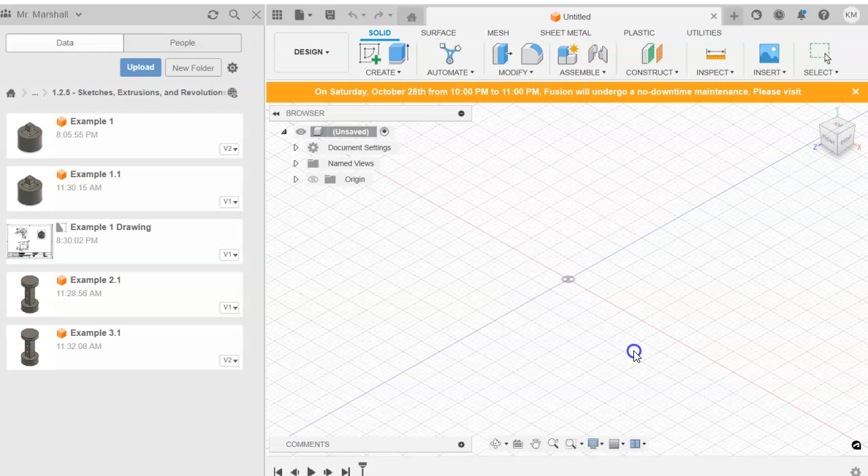I've got Fusion up here with the data panel open. Let's go ahead and start a new file. I'm going to hit save since this is untitled right now, and we're going to call this example 2. Once it's saved, you'll see it pop up in our data panel. I'll minimize that with this waffle button, and let's get to dimensioning.

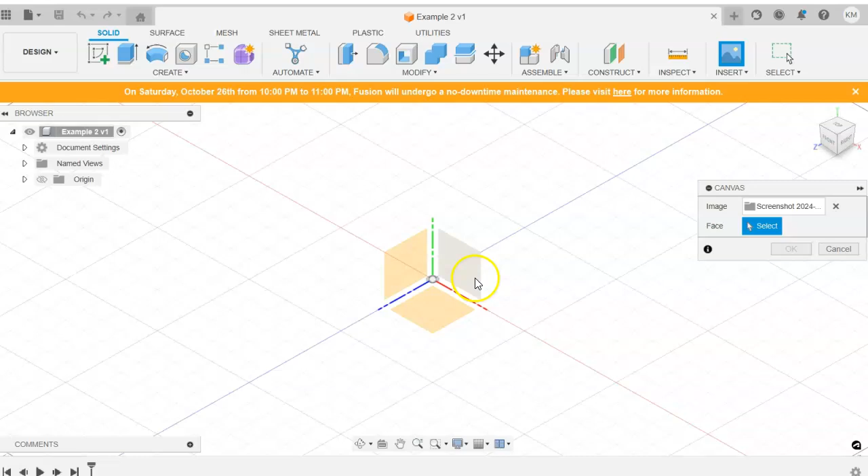As you saw in object number 1, I placed a canvas which we can use to reference, and we're going to do that as well for object number 2. Before we get started, I'm going to hit Insert and move down to Canvas, and find a picture from my computer saved on my desktop. I'm going to place that on the plane we're going to be sketching from. The first sketch is going to be on an XY plane, so let's choose that to place our canvas. I'll pull it out slightly to the side so it's out of our way, and hit OK. If I go to our front view now and zoom in, we can see that reference drawing there to pull some dimensions as we model this object.

Another important thing to note is in the last model we changed our document settings to millimeters. This one is in inches, so I just want to double check. We did not change any settings, so we should be good to go there. But if I hit this flyout, I can double check to make sure our units are in fact in inches.

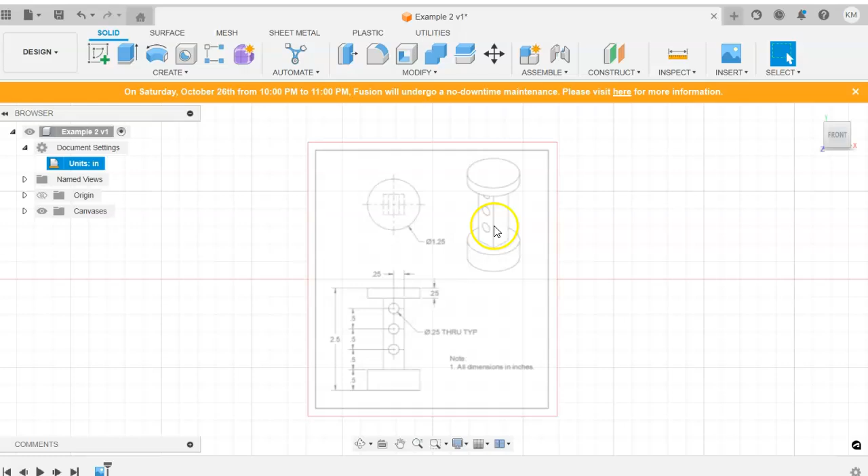So as we look at this object, let me go back to my front view again. It's like a bit of a dumbbell shape, and I see quite a few features here. Let's break this down and think about how we're going to approach this modeling sequence. I see this base, this diameter or rounded base. Then we have a rectangular column running up through the middle, as well as a round top. And within that column, it looks like we've got 3 holes running through it, so 1, 2, 3, 4, 5, 6. I see 6 different features in total making up this object. We're going to work from the ground up: this base, then the rectangular column, then the top, and then we'll work on these holes.

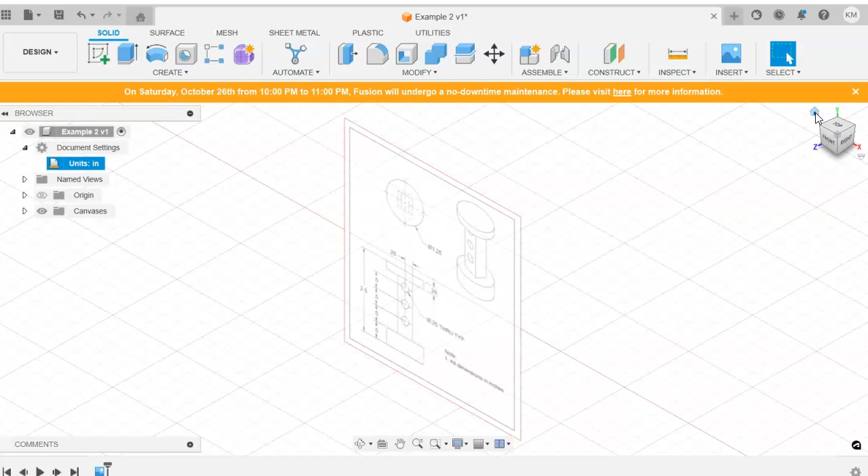Let's go ahead and get started. I'm going to move back to my isometric view using my view cube, and we're going to create our first sketch. Zoom out to where I can find our origin, and yes, we're going to sketch on the XY plane. Now for this first rounded base, let's go ahead and use our revolution command again. It's a command we just learned.

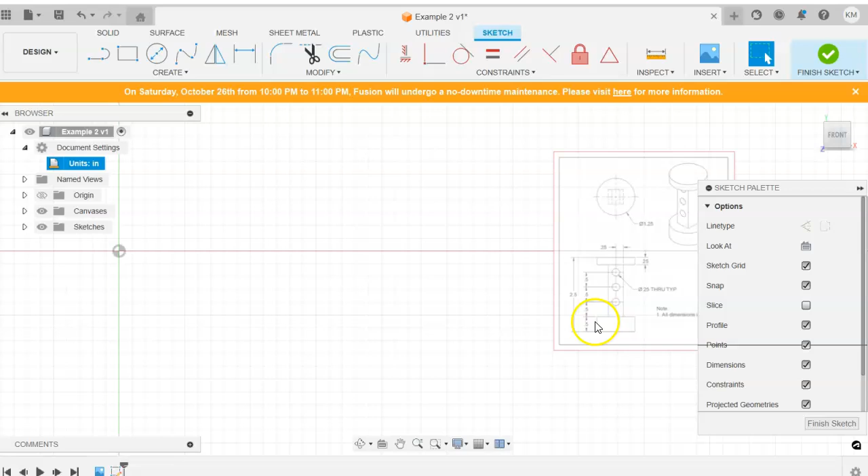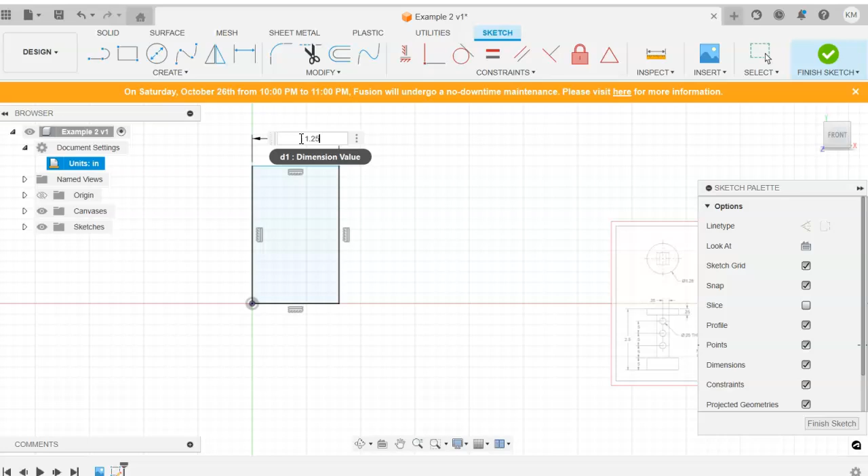It's got a diameter of 1.25, that's the total diameter. So I'm going to use a radius of half of that, doing half of 1.25, and I need to pay attention to my extrusion height here of 0.5, it looks like on our reference drawing. So I'm going to draw a 2-point rectangle starting on our origin. I'm going to use our dimensional constraint here, and I'm going to use a formula. So rather than typing in and doing the math on my phone or something, I'm going to place that constraint and say this is 1.25 divided by 2, and hit enter. It goes ahead and does that math for me, which is nice. I'm also going to put a vertical constraint here, which again was that 0.5 inches. I've got that rectangle now.

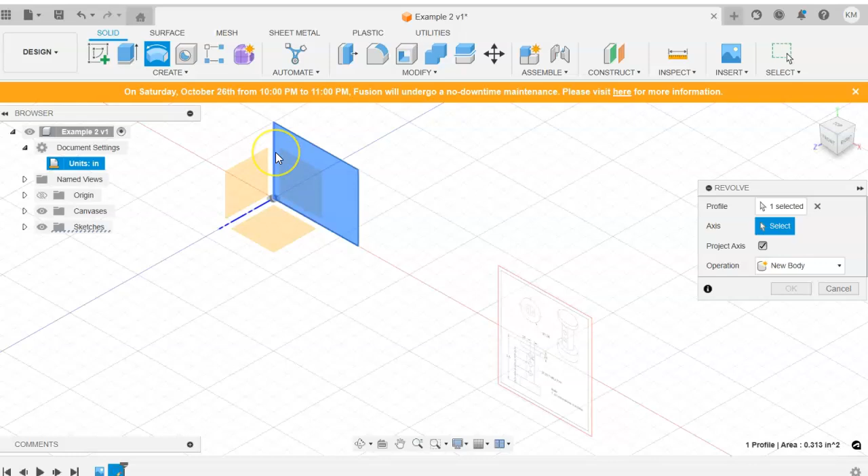We can go ahead and hit Finish Sketch, return to isometric using our view cube, and let's use that revolve command. It's automatically selected my profile. I need to select an axis, however, so I'm going to select the axis that is actually my Y axis off of my origin. It's also the left edge of the rectangle we drew, and you will see now that we've got this rounded base that we're going for. Go ahead and click OK, and our revolve has served us well.

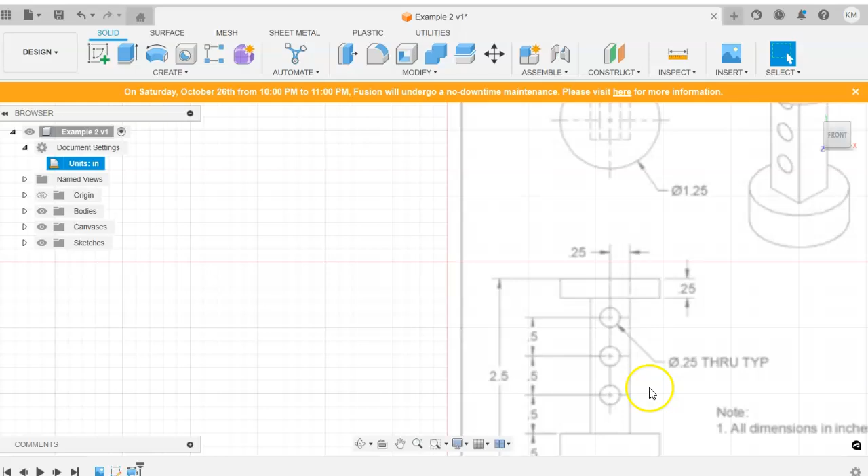Now let's go ahead and create this rectangular column coming off of the top. I'm going to glance at our reference drawing again to get some dimensions. And as I look at this, frankly, I think we're missing a dimension.

I would like to see this total distance here, but assuming these holes are centered within the column, I can see a 0.25 dimension going halfway. So I'll make the assumption that the entire column is 0.5. Looking up here, it also looks like a square, so I'm going to make this a 0.5 by 0.5 square.

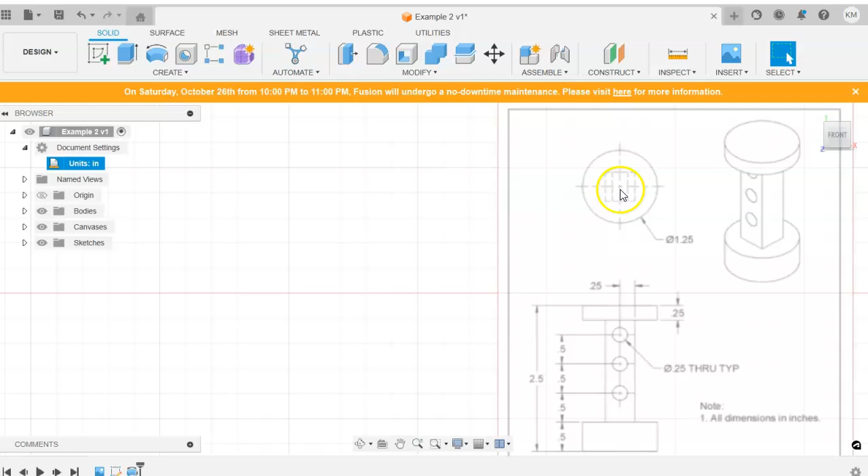Now I do think we need dimensions for that when we actually draw this. I think our reference here is incomplete and we should have those dimensions specified.

So let's start a sketch. We're going to work on the top of our base. Select that as our surface. We're going to draw a 2-point rectangle, kind of covering over that origin. We're going to use a dimensional constraint here and make this 0.5 by 0.5.

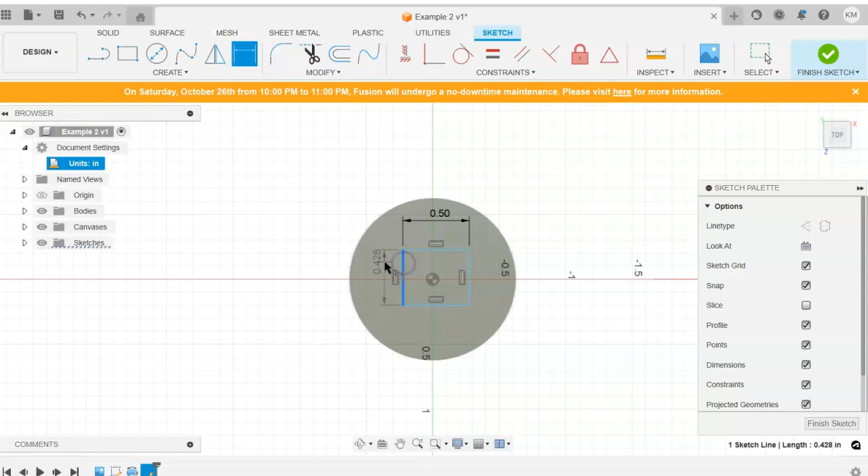Now that covers the size of our feature, but we need to include some extra location constraints. So I'm going to make this 0.25. And that was horizontal, so we'll also do a vertical here of 0.25. All of our lines are now black in color, which means they are fully constrained.

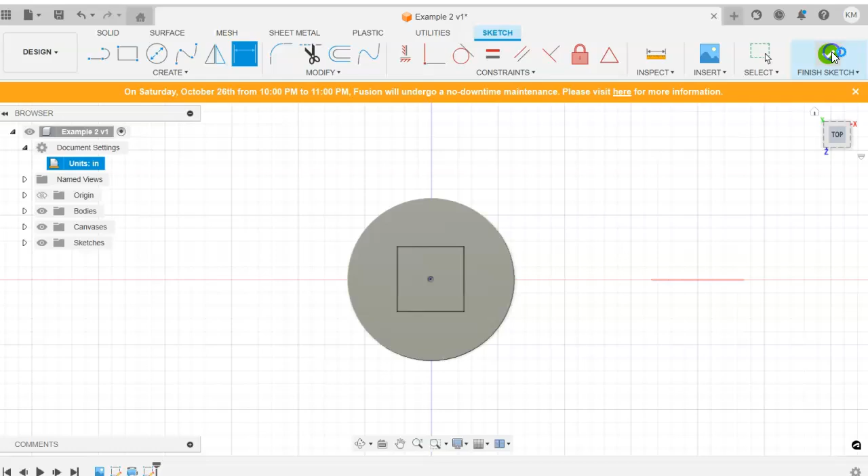So we can go ahead and hit finish sketch, and we're going to extrude this up. I'm zooming in here on my reference again to see this extrusion height. We're going to have to do some math again.

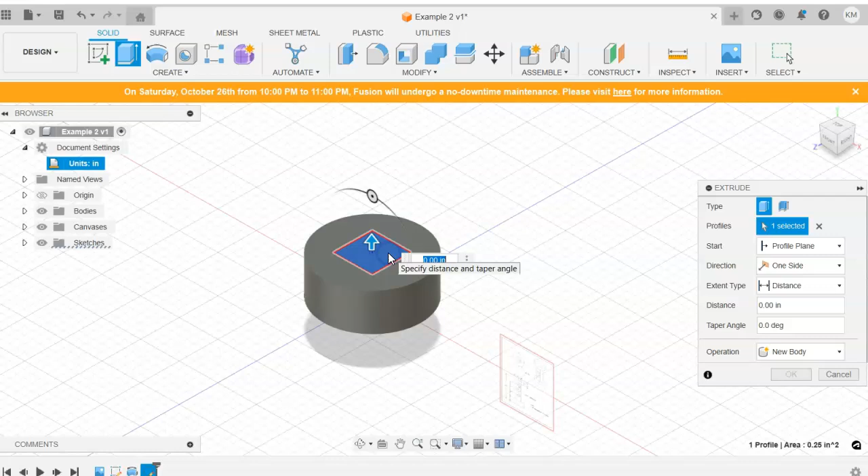So I'm going to use a formula here. 2.5 is the total height. I've got my base of 0.5 and my top of 0.25, so I'm going to take those two things out. When I make this extrusion, I'll go to extrude, select our profile here, which is that square, and type in 2.5 minus 0.5 minus 0.25, then hit enter. That now gives us an extrusion distance that would be the total of what's there.

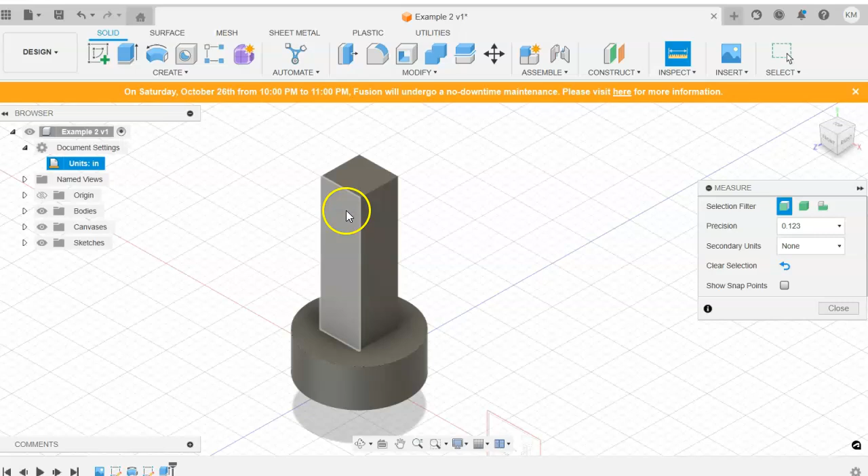I can use this inspect tool, which defaults to measure under the Inspect ribbon, and choose 2 points or an edge. I'll just do 2 points, and inspect that to see our distance is 1.75, which makes a lot of sense. When I add 1.75 to 0.5 to 0.25, I do in fact get 2.5, our total height of our object. So we are good to go.

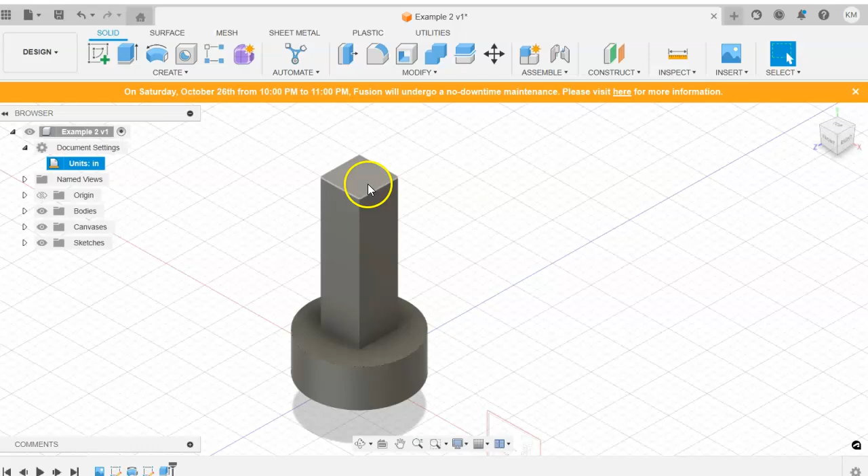Now let's go ahead and create our top. I did revolve for the first time around. I think this time around, let's just draw a circle and extrude. I think it'll be slightly easier.

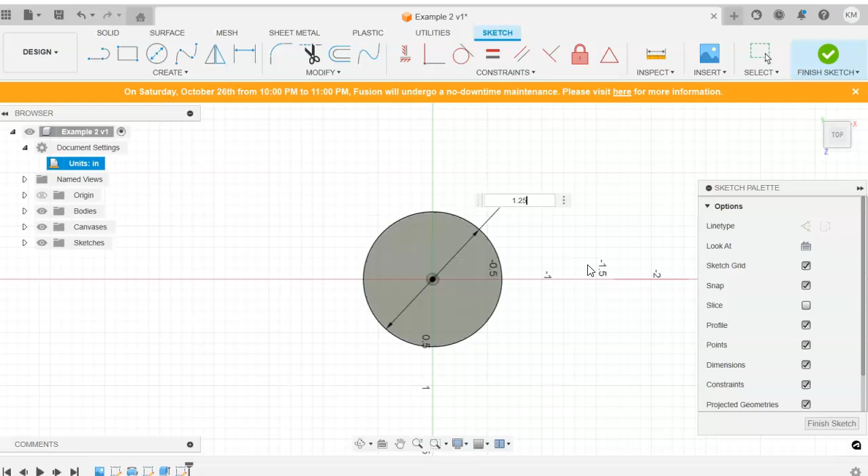So I'm going to create a sketch on the top of our column. Use the circle command, starting at our origin, and pull it out roughly to the same size as the base. It snapped onto that for me, but it's still blue, meaning we still need to put a dimension. You'll see it's slightly bigger, which is important — always good to go back and double check. Diameter of 1.25. Go ahead and finish sketch and extrude this up.

Now I don't want to just choose this outer perimeter. I want to make sure I choose both profiles — out here as well as that square profile. Now you see I have a complete circle, and we're going to extrude that up 0.25. Hit OK, and now we've got roughly this dumbbell looking shape.

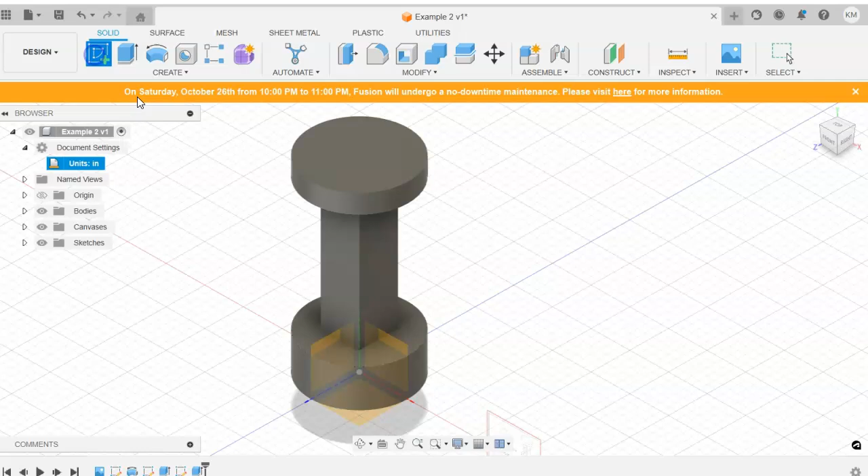We've got 3 of our features. We just need now the holes that run through the column here in the center. So let's tackle that. We're going to start a sketch and select this surface facing the front view, as it is oriented in our reference picture. If I zoom in here, you can see those holes are on this little face here, so we're going to select this face on our dumbbell.

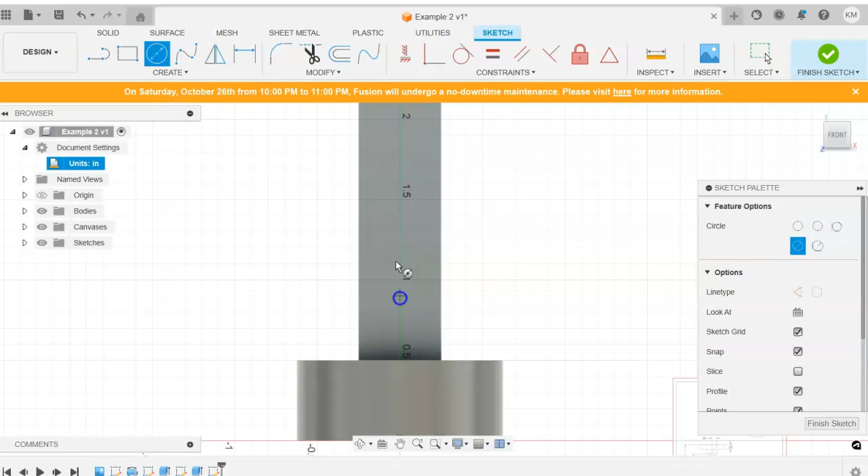Okay, I'm going to draw 3 circles here, and we'll learn a couple new commands to fully constrain this. I'm just going to drop 3 circles in place. Oh boy, that was pretty rough — going all over the place.

I'm going to control the size of our first circle, which looks to be a diameter of 0.25 for all of them. So I'll use the dimension constraint, pull this out here, and do 0.25. Now, certainly you can use the same dimensional constraint on all of them, but I'm going to show you a couple of other things we can do.

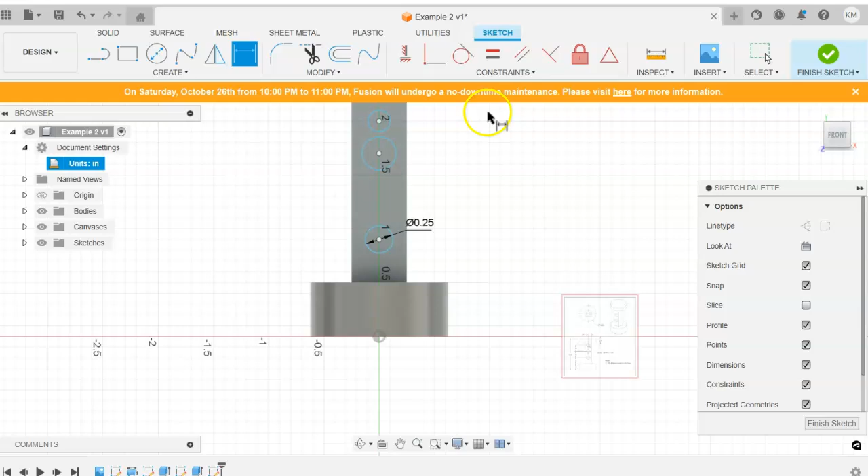Let's use this equal constraint. Underneath my constraints ribbon, if I use that, I can select my base — where the reference point — which is this one that I've already set as size.

I can left click on these other drawings, these other circles, to make it the same size as well.

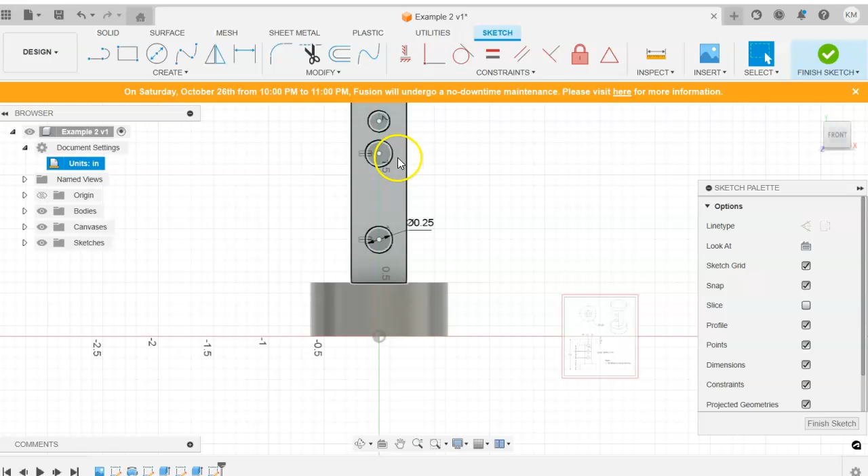I'm going to hit this equal constraint one more time. Choose the first circle that we've already constrained, and then select that second one. Now you'll see that all of these circles have this little equal constraint next to it.

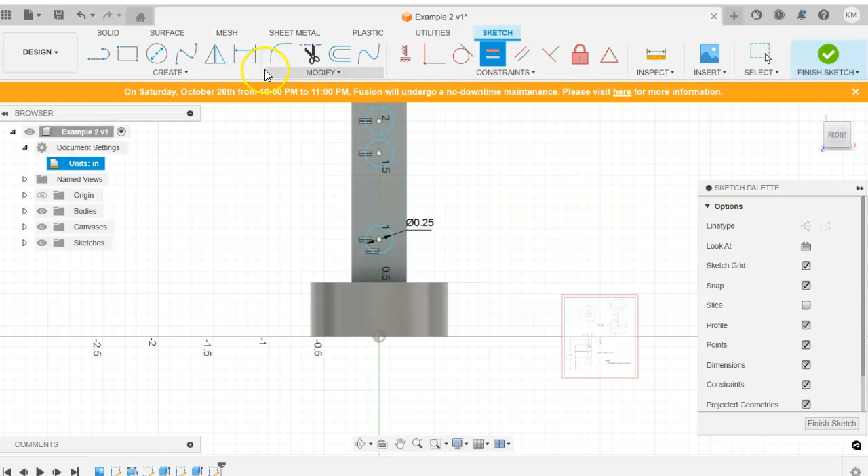Now we can also locate this first circle. I'm going to go back to my standard dimension constraint, and put in the distance of 0.5, pulling that off of the edge. I think it's probably fastest that we just continue with that 0.5 dimension for all of them as our reference drawing shows.

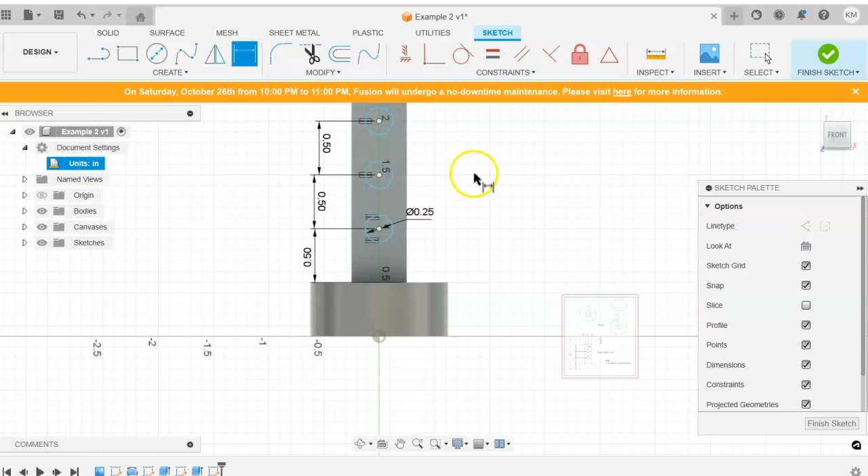Perfect, looking good there. And we need to center this within our object, and there's a couple ways we can do that. Let's experiment with this, if you will.

I'm going to go ahead and draw a line, from midpoint to midpoint here, all the way through my column. Something else, just a feature I wanted to show you. Now I have this line, but I'm just going to use it as a reference point. I don't actually want this in my model.

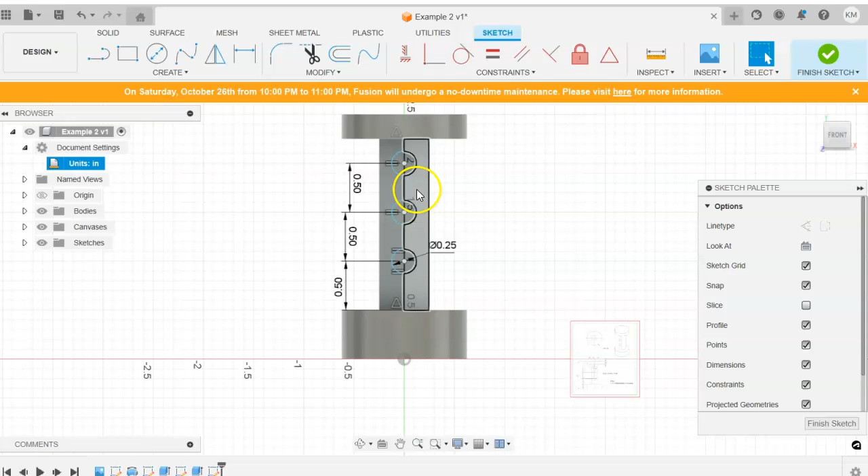So what I can do is hit escape to get out of my line command, and select that line. Notice that underneath the sketch palette, I've got this line type here. If I left click on that, I can change the line type to a construction line. That is something that won't be physically present in the model.

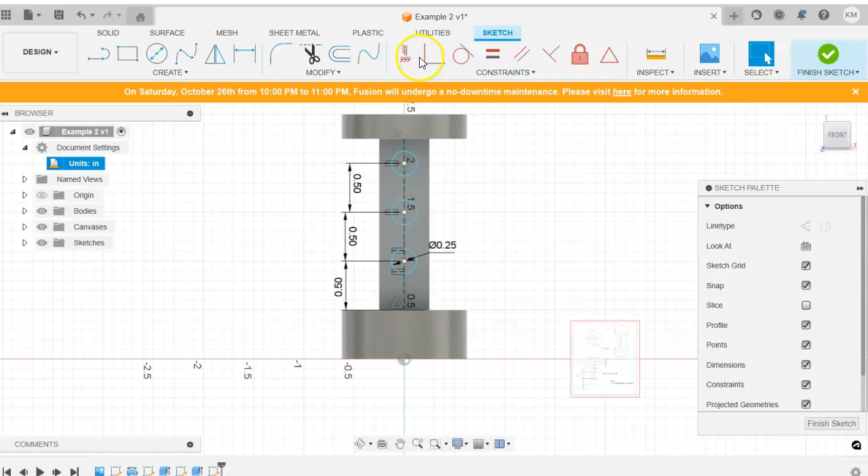It's just something that I can reference. Then when I use that, I can also use my coincident, or a horizontal vertical constraint, perhaps use that line to make sure these circles all stay in alignment.

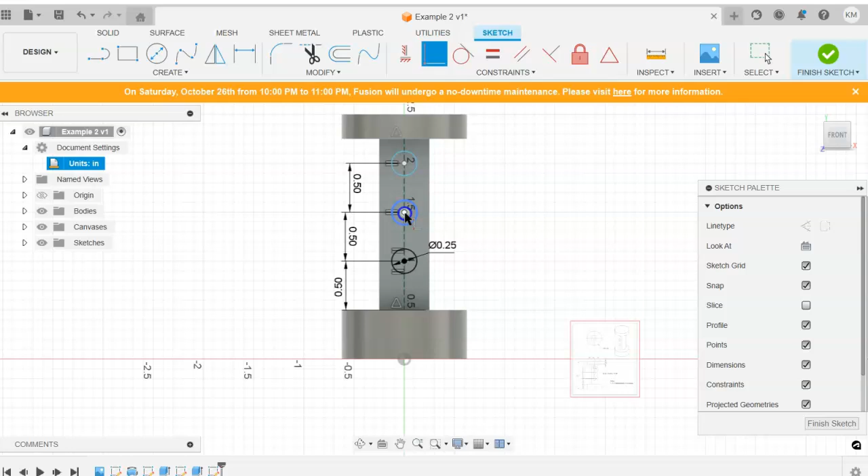So let's see if I can do a coincident between this circle and that line. Now it fully constrained my first circle, which is exactly what I wanted to do. Let's see if I can do that for the second circle as well. I sure can. And the third circle.

So that's one way we can fully constrain this, just by using a construction line and the coincident constraint to fully constrain these circles. That's one method of going about doing it.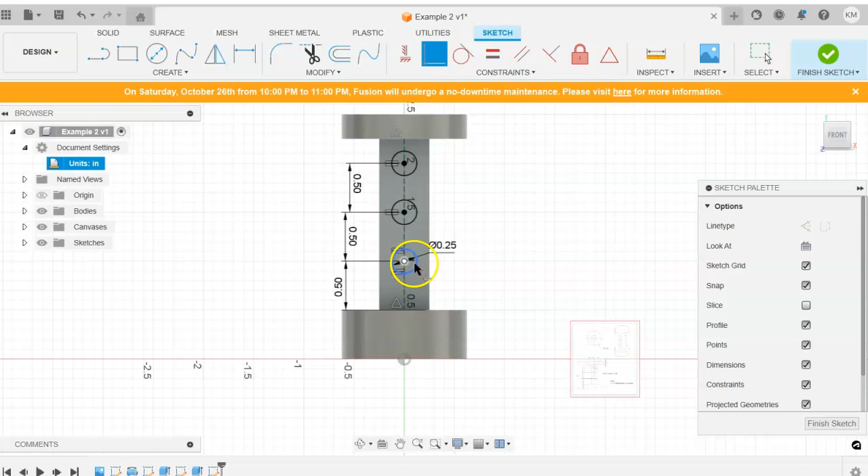Another method would be to put a horizontal dimension here with the first circle, and then use the horizontal vertical constraint to make sure the other two are aligned vertically with our first one. Those would be a couple different ways we could go about fully constraining this picture.

Now this third circle does look a little high. Let's just double check, but in fact, that is the same thing that we have here. So I think we are good to go with the holes that we'll be creating with these circles.

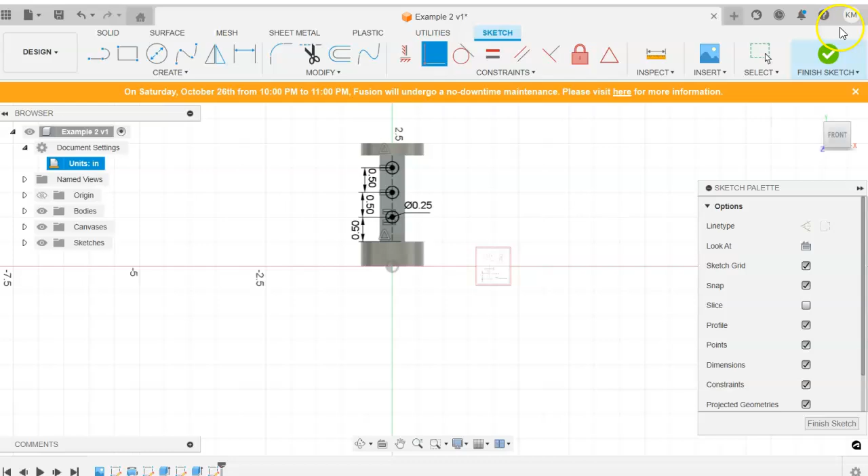We're going to hit Finish Sketch, use our View Cube to go into Isometric. We're going to do an extrusion, and make sure we select all three of these circles.

Now, I want to make a cut. I don't want to make a new body or join. We're going to cut into the object, so I want to make sure this is negative. I'm going negative 0.5, which should take it all the way through the object.

Hit OK. I'm going to use our free orbit just to lightly spin this around to make sure that, yes, I do in fact have holes going all the way through my object.

That canvas is sitting here. We don't need that anymore. You could leave it, it's not going to hurt anything, just like our construction line is not going to hurt anything. I'm going to go underneath canvases here and delete that out just because we're done with it.

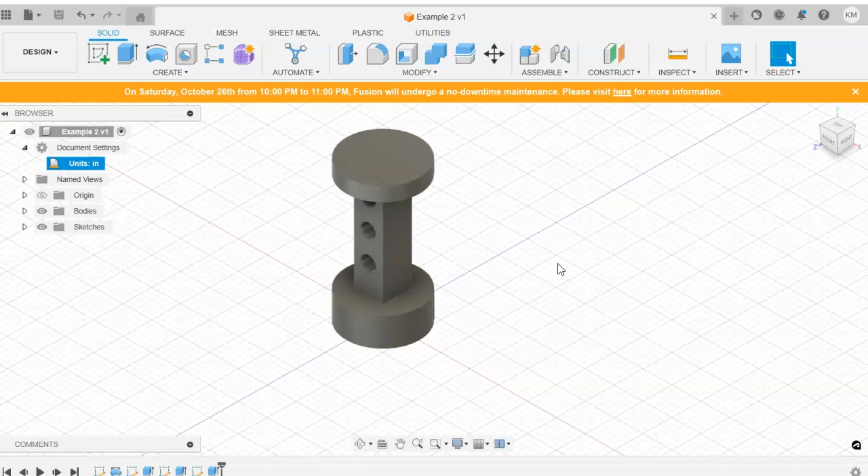Hit Save just to make sure our work is saved. And this is a video showing you how to create object example number 2 in activity 1.2.5 for PLTW IED.